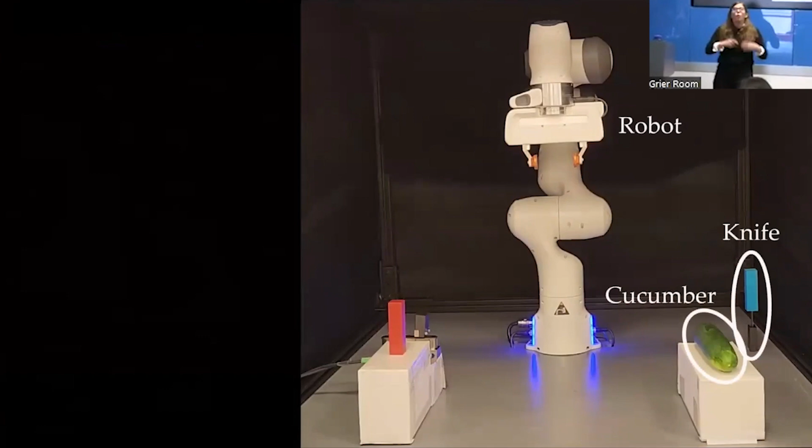So let's say we have our robot here, we have a knife, and we're going to chop cucumbers. I like cucumbers in my stir fry—sometimes it's the most controversial thing I say. So we're going to cut cucumbers, and think about what it takes for a robot to cut a cucumber.

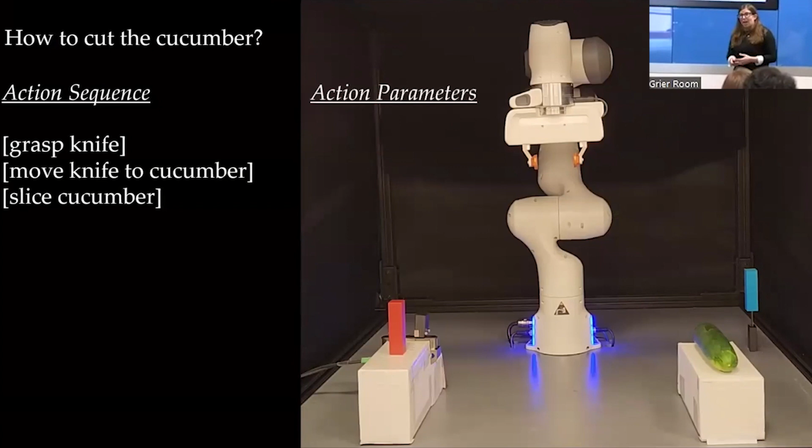I'll frame this as: the robot first has to determine a sequence of actions to complete the task. To cut a cucumber, our robot is going to grasp a knife, move the knife to the cucumber, and then slice the cucumber. Because we want the robot to execute this in the real world, it has to solve for the parameters of these actions, and these parameters are discrete and continuous and have constraints.

For example, to grasp the knife, we have to select how we're going to grasp it, but do so in a way that we can reach that grasp and exert enough force to actually slice through. If we're slicing the cucumber, we have to decide what forces to exert and how the robot will exert them. Many, if not most, of these parameters are continuous. So given this, can the robot find a satisfying set of these parameters?

Can the robot succeed in accomplishing the task with this given strategy? I'll lead the witness slightly: if the robot were to accomplish this sequence, when it goes to cut the cucumber, because nothing's holding it in place, it would roll around. Trust me, I've done it. We'd say that's bad, we don't want that to happen. The robot would fail because it's violating a constraint of holding the object still while slicing it.

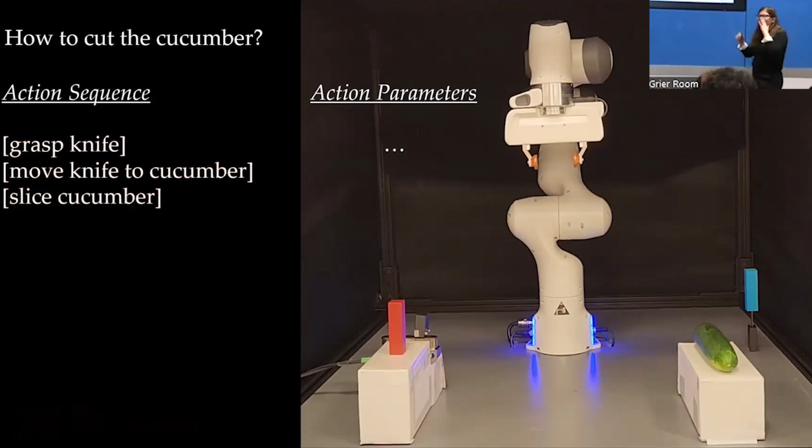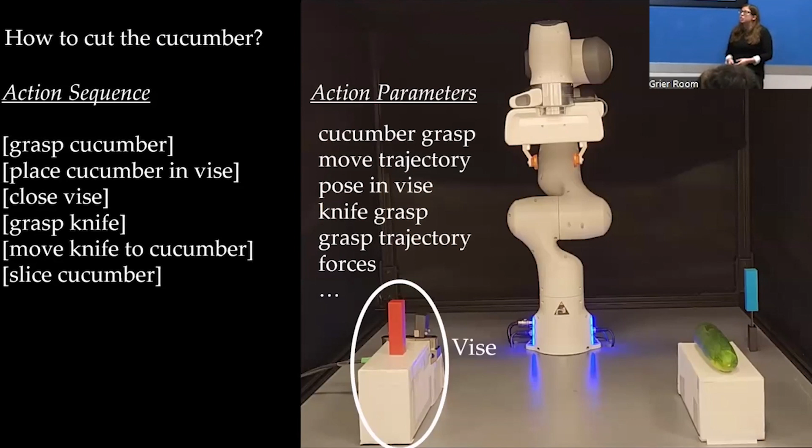So what I want my robot to do is find a new strategy, one that secures the cucumber in place before cutting it. Looking at the environment, our kitchen has a vise. We could ask our robot to find a new sequence: grasp the cucumber, place it in the vise, close the vise, grasp the knife, move the knife to the cucumber, and slice it. Again we'd have to solve for the action parameters, including how we grasp the cucumber and where we place it within the vise. So, would this succeed?

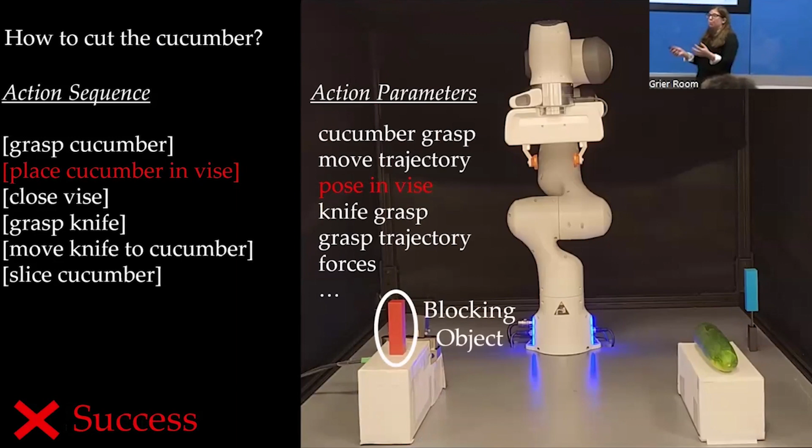Well, in this case we have this blocking object sitting on top of the vise, which means there's no collision-free pose for the cucumber in the vise, so we cannot place it there. Again, this strategy would not succeed, and our robot has to find a new sequence.

So here we can imagine the robot grasping the red block, moving it somewhere, anywhere, and then continuing the strategy from before. Will this succeed? This game is fun, I could play it all day, but third time's the charm, and in this case, yes, our robot is able to succeed. It grasps the red block and moves it anywhere, as long as it's out of the way. Once done, it goes over and grasps the cucumber.

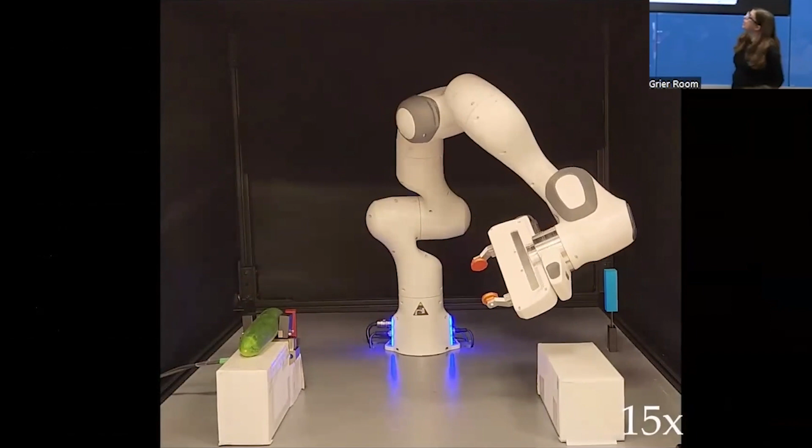The vise is part of the system, so it's the robot's responsibility to open and close it. Once it's done that, it goes to grasp the knife—oh, this gets people, it's a real knife, I do intend to actually cut cucumbers. So we grab it and actually cut the cucumber. Great, success. Good job, robot.

So in this case, the robot had to solve for the sequence of actions and the parameters of those actions, and those choices impacted each other as well as being impacted by the constraints of the task and environment. Good job, robot—I'm glad it accomplished this task in this environment, but really, I want my robot to be able to accomplish many tasks in many different environments.

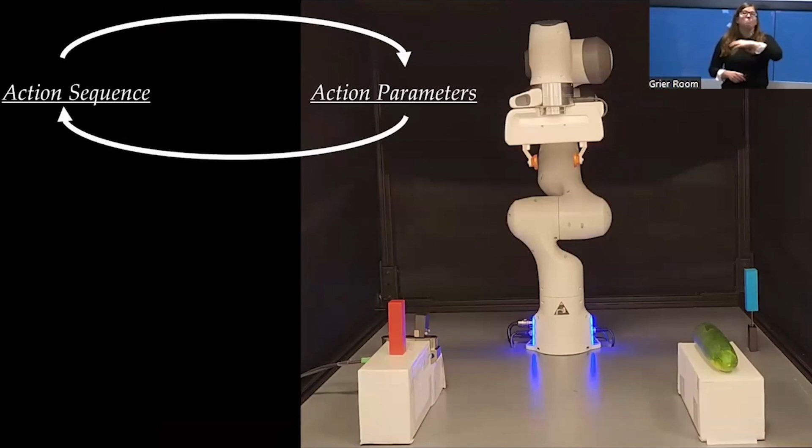And so it's important that the robot's behavior is able to generalize. In order to generalize, I'd argue the robot has to do the type of reasoning we walked through. It has to reason over how to satisfy all of these constraints across this hybrid combinatorial search space, accounting for the environment and the task.

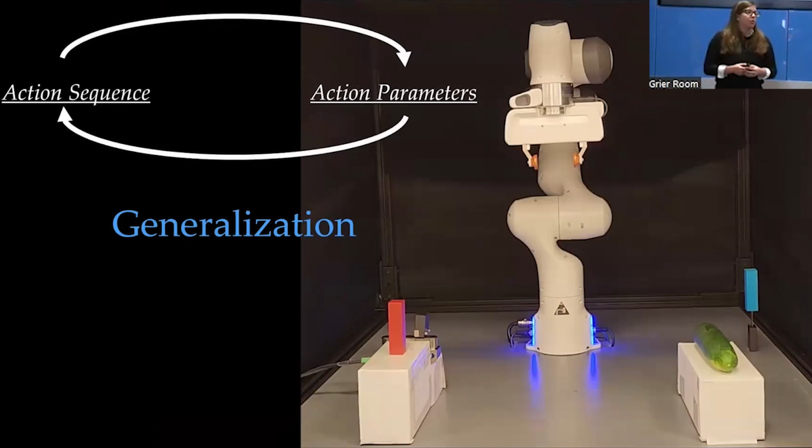Because of this, I adopt a model-based approach where we empower the robot with models of the world, which could come from engineering mechanics or could be learned, and the robot reasons over these models. If we prescribe the robot exactly what to do, it will struggle to generalize, so I want the robot to be responsible for the reasoning. Given that we're taking this model-based approach to solve a hybrid combinatorial search problem in robotics, this is often framed as task and motion planning, or TAMP.

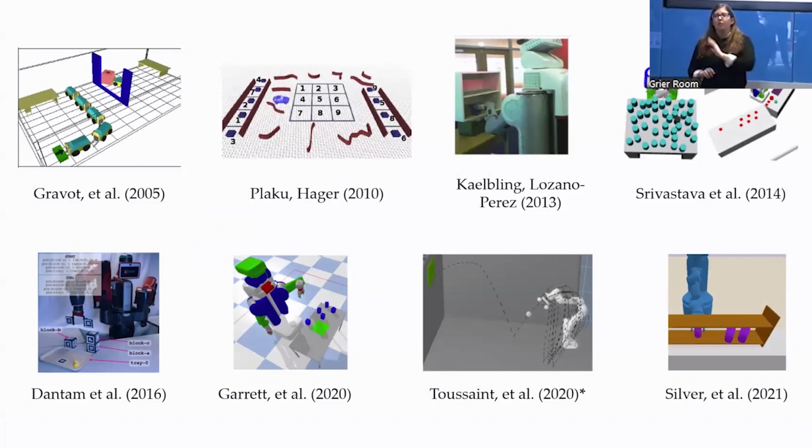My lab mates and I wrote a survey paper on this a few years back, and there's been a lot of really lovely work in task and motion planning, but the overwhelming majority of it, with one limited exception, has been focused on reasoning over constraints related to geometry. What I mean by that is reasoning over whether a motion is collision free, or a placement is free. No shade, this is still an incredibly hard problem—you have to reason over confined environments, lots of objects, or long horizons. But I'd argue this is fundamentally limiting if you're only reasoning over geometry.

This is why a lot of task and motion planning demos often look like pick and place. If we think about the kinds of tasks I started the talk with, I'd argue that in order to solve these types of tasks, our robots have to reason over both geometry and physics. We saw in our example how the need to exert force changed how we had to secure the object. You can also imagine if we're swinging a hammer, or packing dough, that all of these impact our robot's decision-making process.

The main thrust and goal of this thesis is to propose models and algorithms that enable reasoning over geometry and physics in the context of multi-step manipulation problems. For an outline of where we're going to go, I'll start by thinking about how we can plan for this multi-step manipulation, specifically focusing on where we're considering force and motion. I've already highlighted why that's particularly important.

We're going to start off in the context of a body of work we call forceful manipulation, and then we'll actually do a detour within that to talk about in-hand manipulation. Throughout all of this work, we're going to be proposing new and leveraging existing models. We'll verify that those models hold in the real world, but as we get into messier and messier manipulation, it might be difficult to have such certain models.

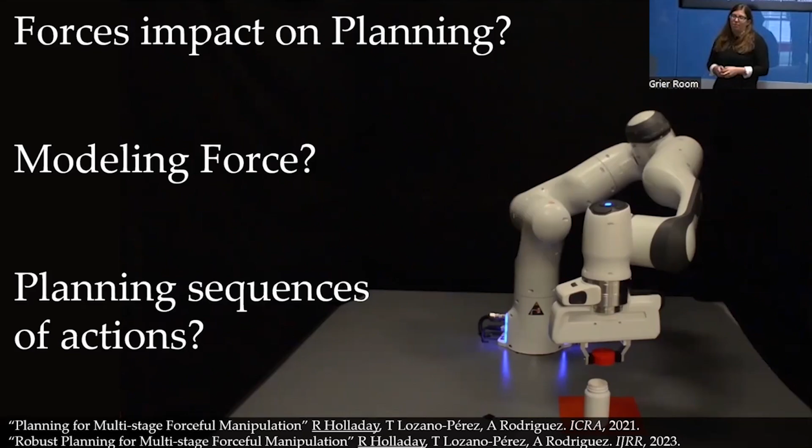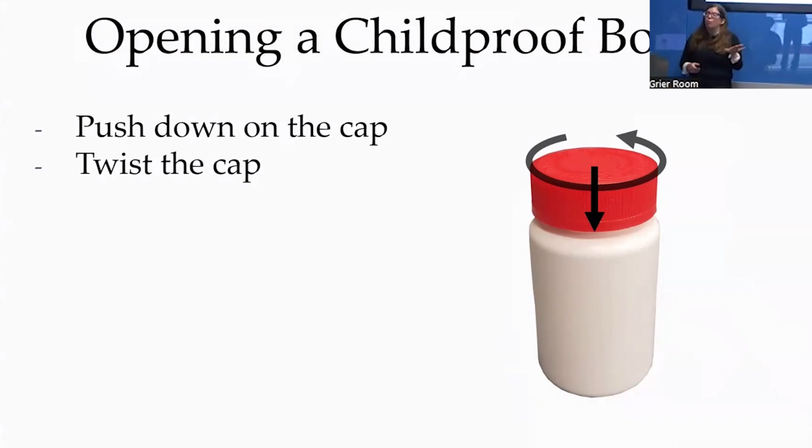The running example throughout much of this section of the talk is going to be opening a push-twist child-proof bottle. This is a bottle where, in order to open it—my favorite thing—you have to both push down the cap and twist. So we'll think of this as having to exert both a downward force and a torque about z. For now, we'll assume these quantities are given, but later in the talk we'll think about how we can relax this assumption.

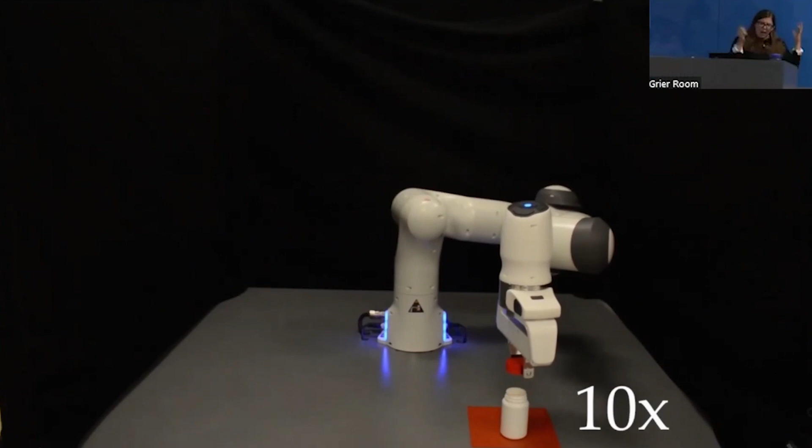So if we want to open the bottle, here is an instance of the robot doing that. It exerts that push-twist on the cap of the bottle, and then once it's done that, it can open up the bottle. And the bottle is full of rice—there's actually no pills. Okay, so the robot has done this, and we can think about how the need to exert force, how that push-twist action, impacts our robot's decision-making.

In the first way, we already saw in the cutting example, which is that if we're going to exert force on an object, we have to hold it still. To prove that here, we do not hold the bottle still—it slips relative to the table, and so we are not able to successfully exert our push-twist, and when we go to open the bottle, we do not succeed.

If you're going to exert force on an object, you have to hold it in place. The environment, either through objects or the robot, has to hold it in place. I'll note that the reason it didn't slip before is because in this video, the object is sitting on a high friction surface that's effectively holding the bottle in place. I'll refer to this as our fixturing constraint, that you have to hold the object still. That's the first way that forces impact planning.

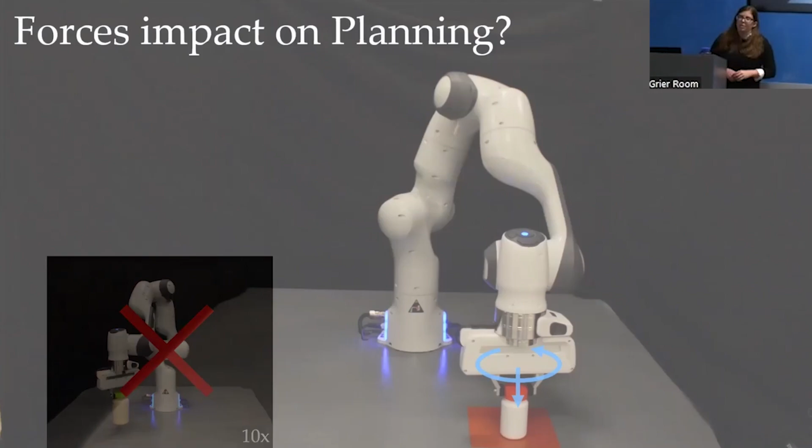And the second way is that if we're going to exert a force, our robot has to be strong enough. To explain what I mean by that, we're going to do a dive into mechanics.

I'm going to view the entire system while we're opening the bottle, including the robot, the bottle, and the table, as one kinematic chain. That kinematic chain is formed of a series of joints. Some of those are robot joints, and some of those are frictional joints formed via contact, for example, the robot's grasp on the bottle.

The constraint that needs to be satisfied in order to successfully complete this task is that in the face of the exerted wrench, the force and torque experienced during our push twist, each of the joints within our forceful kinematic chain needs to be maintained. Each of our joints needs to be able to resist the wrench.

To capture this, we're going to mathematically model the amount of force and torque that each of our joints can resist. If all of our joints can resist it, we'll say that each of our joints satisfy the constraint and our overall chain is stable. Yes, I'm misusing the word stable.

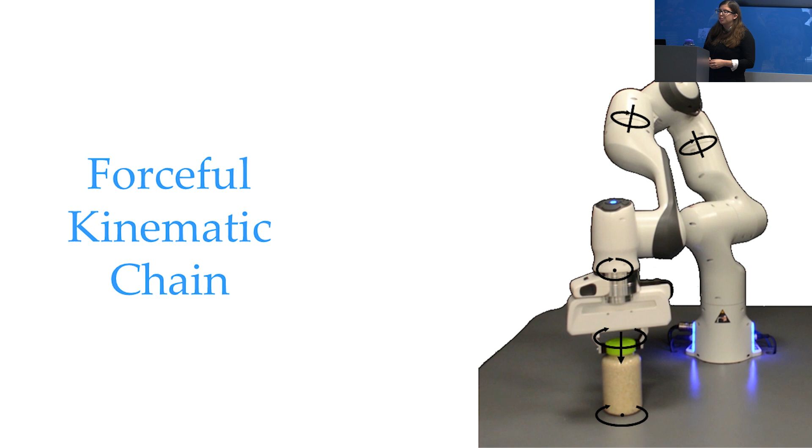Okay, so to map this through, let's think about our different types of joints and how we can capture how much force and torque they can resist. I'm going to start off with, I'd argue, the easier case, thinking about a robot joint. Robot joints have torque limits, they're limited in the amount of torque you can exert. Breaking that joint, or violating that constraint, would correspond to the robot hitting a torque limit.

It makes a very sad noise. We want to avoid that. So how do we capture if we're within our robot's torque limits?

What we need to do is take the force and torque experienced during the task and transform it into torques experienced at the joint. The way we do that transformation is we take forces and torques, called wrenches, experienced in the task, and transform them into the frame of our hand, our end effector. This is a rigid body transformation. Now we need to transform it into torques at the joint.

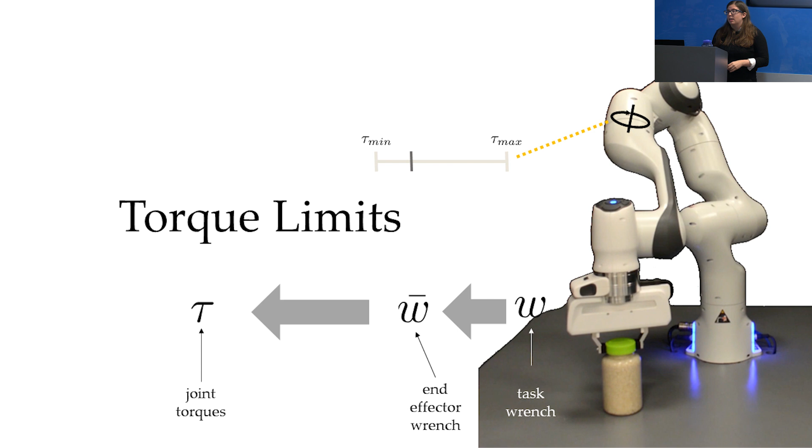The way we do that is an operation called the manipulator Jacobian. If you take the forward kinematics of a robot and differentiate it with respect to time, you get the Jacobian. The Jacobian maps joint velocities to end effector velocities, and beautifully, the transpose of the Jacobian, which is what we have here, maps end effector wrenches to joint torques, which is exactly what we're looking for.

I'll note that it's parameterized by our joint angles, our configuration Q. Intuitively, this makes sense because if you think about your own arm, there may be certain configurations where you can resist more or less force, and our configuration-dependent Jacobian is capturing that.

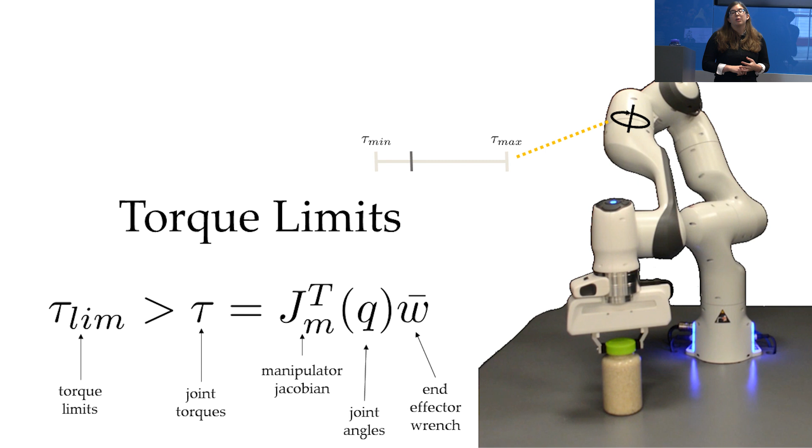We use our Jacobian, transform into joint torques, and then we can compare to check if we're within our robot's torque limits, which we'll assume are known. We can do this for all of our robot joints, evaluating if our joints satisfy our constraint. Great, these are our robot joints.

We have another type of joint that we're considering, which is our frictional joints formed via contact. In this case, we have two examples: the robot's grasp on the bottle, and the bottle's contact with the table. We'll say that for these types of joints, breaking happens if the two objects move relative to each other. So we want to think, are these joints stable? The question is, what type of motion is achievable for this type of grasp, this type of joint?

Well, I'll observe that both of these are planar joints, and to explain what I mean by that, we'll look at one in particular.

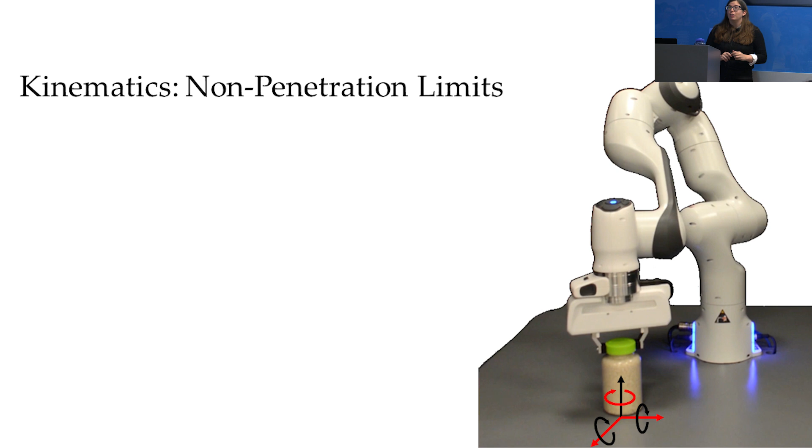If we zoom in on the contact between the bottle and the table, I'll argue that in 3 dimensions, the bottle cannot move. This is because we assume we have rigid bodies, so we cannot rotate or go into the table. In those 3 dimensions, we can resist any exerted force and torque kinematically due to non-penetration limits. Now in the other 3 dimensions, we can move, and we saw it slip, so we know it can. What prevents motion in these directions is friction.

So the question is, how much friction do we have? For a planar joint like this, we can capture the space of exerted wrenches provided by frictional support by something called the limit surface. Because we're dealing with a planar case, we can construct the limit surface either using something called the ellipsoidal approximation or the generalized friction cone.

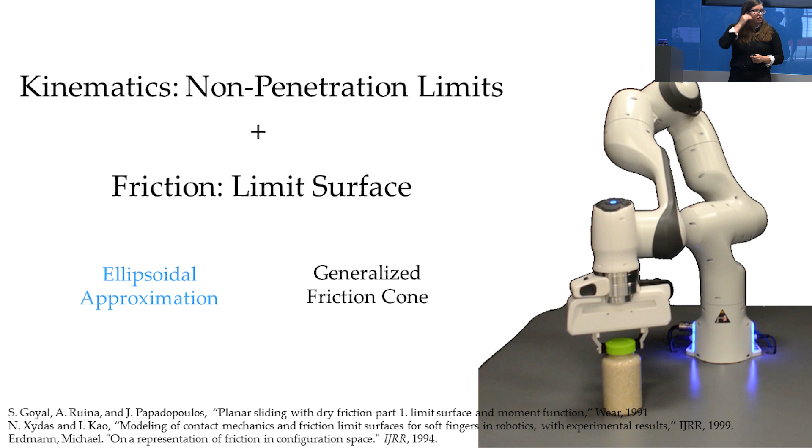To better understand what the limit surface is, we're going to dive a bit more into the ellipsoidal approximation. So if you have a planar joint, and we assume you have uniform pressure distribution and isotropic friction, then you can capture the space of wrenches that a frictional support provides by an approximation called the ellipsoidal approximation. You can capture the space of wrenches as an ellipse.

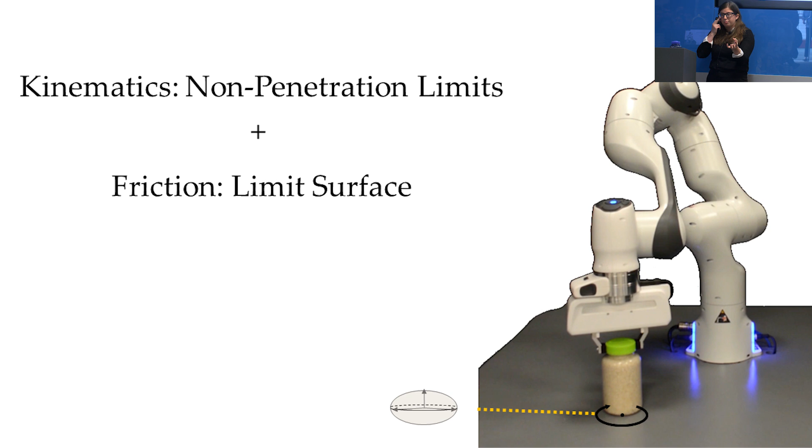Looking at a planar grasp in a bit more detail, one way to think about this is that if we have an exerted wrench and transform it into the frame of the hand, if the exerted wrench lies within the boundary of the ellipse, we say we have enough frictional support to resist that exerted wrench, and our objects are not going to move relative to each other. Effectively, friction wins.

But we can imagine there are different grasps where, when we transform the exerted wrench into the frame of the hand, if that exerted wrench lies outside the boundary of our ellipse, then our exerted wrench overpowers our frictional support and the two objects move relative to each other. Now, how it moves is actually well characterized, but we're not going to use that just yet. We're just going to check: do the two objects move relative to each other?

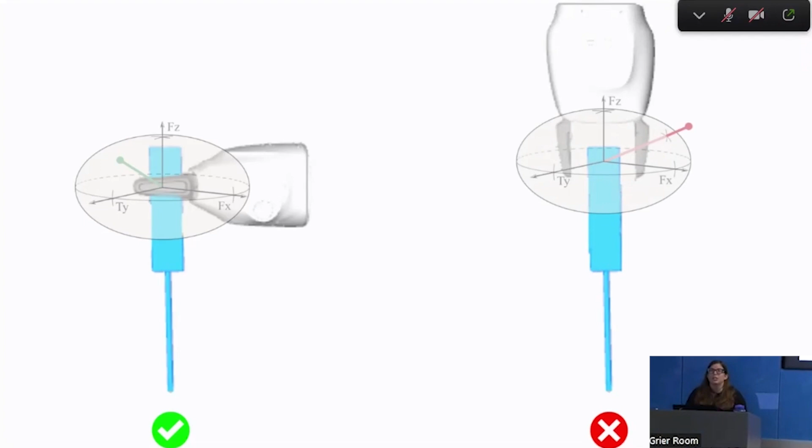Summarizing, the limit surface is in 3 dimensions. As I mentioned, we're dealing with a planar case. For isotropic friction, it's characterized by this matrix A. A is parameterized by our grasping force N, our friction coefficient mu, our radius of contact R, and an integration constant C. This means we assume that all of these quantities are known. Later in the talk, we'll think about how we can relax this assumption.

So to use the limit surface, we do a rigid body transformation to transform our wrench into the frame of the hand, and then evaluate whether this vector lies within an ellipse. This is an incredibly efficient computation. So if we want to evaluate whether our frictional joint due to contact is stable, we're using a combination of kinematics and friction to assess these types of joints.

Summarizing it all together, we now have a way of characterizing, for each of our joints, whether it can resist the exerted wrench. In this case, maybe not a surprise, our constraint is not satisfied. We actually saw this before—this is the case where our bottle slipped, and our models guessed that ahead of time. I made the robot do it even though I knew it would fail. So in this case, I want my robot to find a new strategy that constructs a new kinematic chain with a new series of joints that is stable and where our constraint is satisfied.

Summarizing this section, we captured how to account for the constraints that exerted force imposes on a robot's decision making. We took the intuitive notion of whether the robot is strong enough and quantified it mathematically. While I walked through a couple different types of joints and models, it would be fairly easy to swap in other models. There's a 6D version of the limit surface if you're so inclined, and you could always consider those.

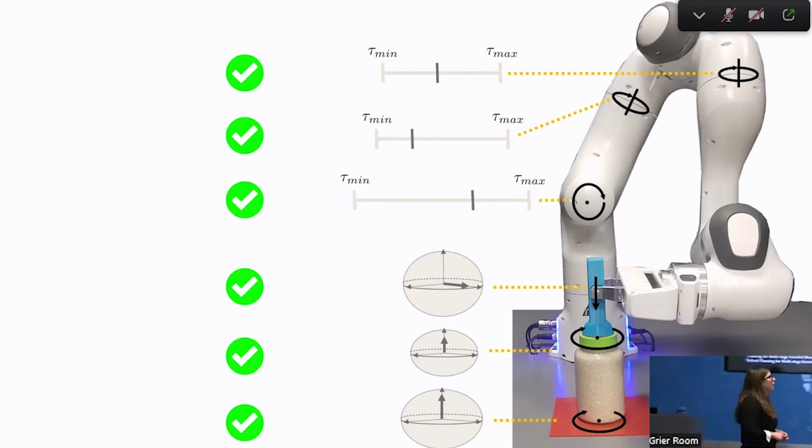Okay, given that we have these models and these constraints, the question is now, how do we plan with them? In order to answer that, I'm going to make concrete some things I was vague about at the beginning, because I've been talking about wanting a sequence of actions, but I didn't define an action, and none of you called me out on it, which is very polite. But now I would actually like to define that.

So I'm going to consider an action as a parameterized controller. We have some controller that we are executing on the robot and has parameters. For example, here is our place action, and you can imagine it's parameterized by things like the grasp and the placement pose. And if you're curious, it is running a joint space and grasp controller.

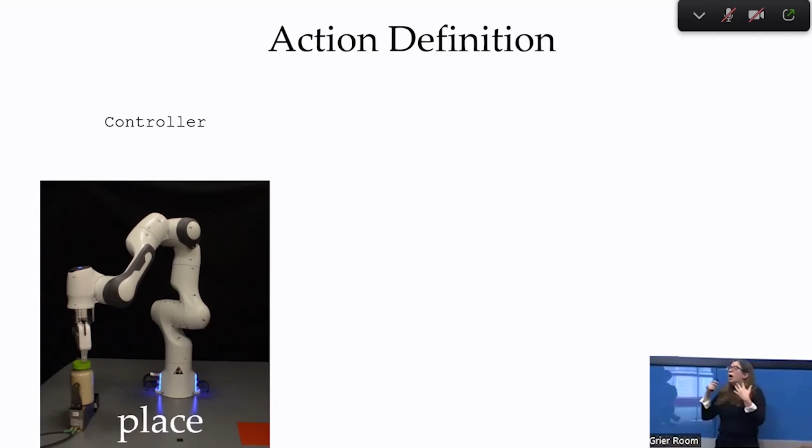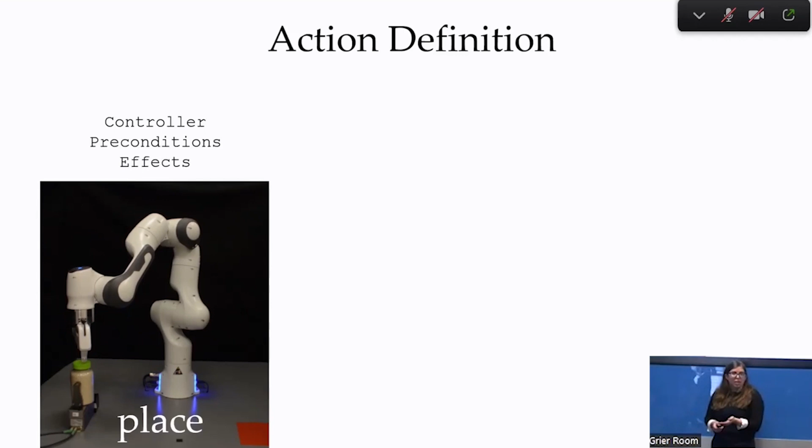Now, we're going to characterize our actions by two things called preconditions and effects. Preconditions are what needs to be true about the world in order to execute that controller. So you can imagine for the place action, a precondition is that our placement pose has to be collision-free. And then we'll also characterize it by its effects. The effects are what are the resulting changes to the state as a result of running that controller. You can imagine an effect of placing is that you are no longer grasping the object. And these are both characterized in PDDL.

So this is one action. We can characterize kind of a whole set of actions. Here's an example of the move action. Here's an example of the push twist action. I want to call special attention to the push twist action, because it is an action that exerts force.

And so what we say is that a precondition for executing this action is that the forceful kinematic chain throughout this action has to be maintained. And so that is how the constraint gets baked into the system, is that it is a precondition for any action that exerts force. I'll also note, if you're curious, that the controller we use to exert force is a Cartesian impedance controller. I'm happy to talk about that at length if anyone wants to.

Okay, so given that we have kind of our sequence of actions with this parameterization, our task and motion planning objective is that we want to find a sequence of actions. We want to find the parameters of those actions subject to constraints. And those constraints are captured in our preconditions and effects, and they relate to both force and motion.

And so there are many task and motion planning solvers, but I'm going to talk about my favorite, the best one, which is PDDLStream. So PDDLStream is a task and motion planning framework. I think it also, in addition to this is what we use, I think it gives a good illustration of kind of what are the challenges of task and motion planning.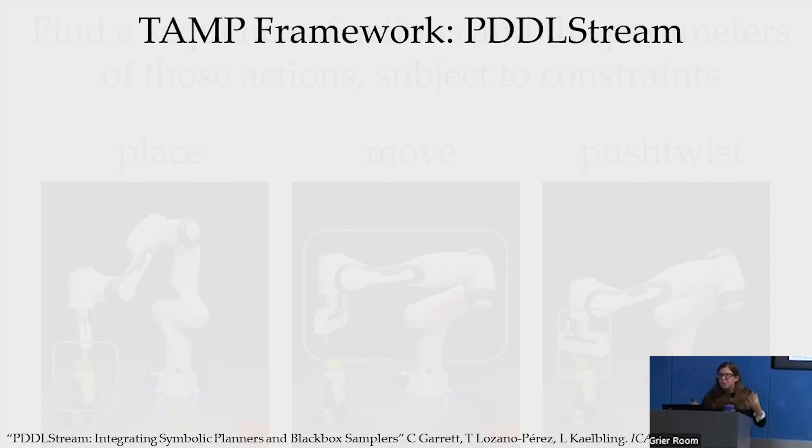But to use PDDLStream, you have to specify a series of what's called streams. And streams can do one of two things. One is that they can generate possible instantiations of your action parameters. Now, your action parameters are often continuous, so you can think of these as samplers, and you could have streams that, for example, sample grasps or sample forces.

You can also have streams that themselves run entire planners, so you could have streams that run a motion planner to sample a trajectory or generate your impedance parameters. Our streams, in addition to generating possible instantiations of our action parameters, they can also evaluate constraints over our parameters. So for example, we've got streams that evaluate our forceful kinematic chain constraint, or evaluate if a path is collision-free.

Now I'll note that the algorithms, the implementation, the models of this, they could be analytical, they could be learned, they could be some combination, you can kind of put anything in here. I'll also note that in defining a new domain, such as considering manipulation that reasons over force, the majority of the work is in specifying the samplers, because that is where all of the gory, messy details come in.

For me, this also highlights that task and motion planning as a computational framework is a way for bringing all the pieces together, but you do not get away from having to solve all of the beautiful physics and geometry problems. Okay, given that we have these streams, we're going to start the algorithm by generating some instantiations of our streams.

So it's going to sample paths and grasps and wrenches. And it's going to take that along with a specification of our actions, our start state, and our goal state, and hand it off to a PDDL planner. This is a domain-independent discrete planner that is going to search for possible sequences.

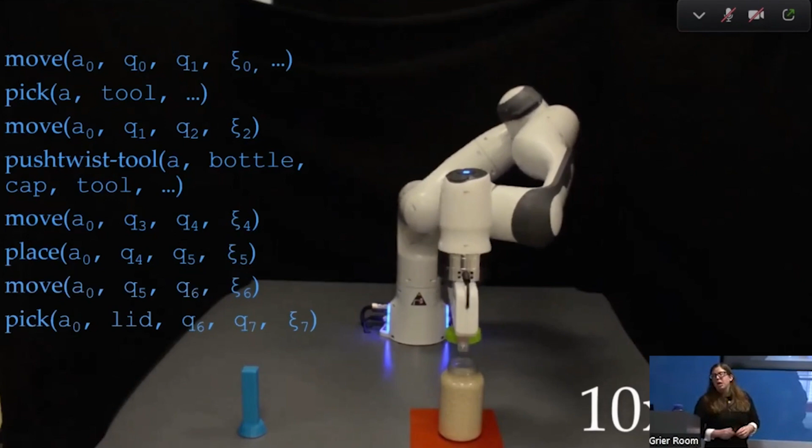And it's because we've empowered our robot with models in an action space that the robot can then use that to do decision making across a variety of different tasks in the same framework. Not only can it solve this task in a particular environment, but it can solve this task in a variety of environments. So here, I've asked it in every case to open the bottle, but the objects are in different places, there are different objects in the scene, and so the robot is reasoning over all of different, infinite number of strategies that it can use.

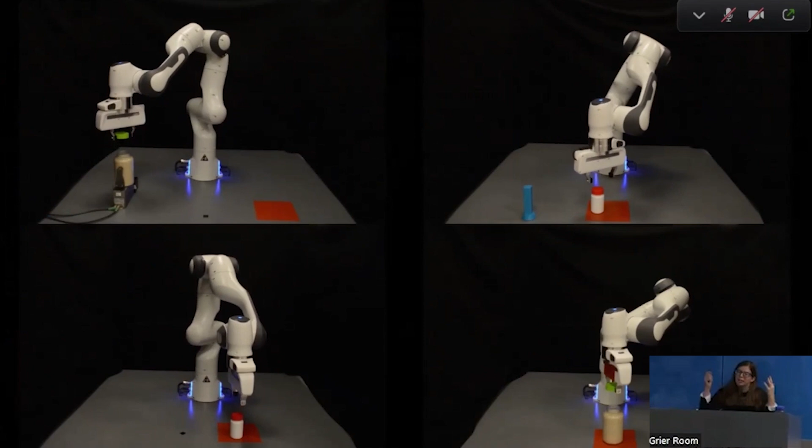Sometimes it leverages the device, sometimes it relocates things, sometimes it uses the tool, and it's able to find this rich set of things, which for me is necessary for the robot to generalize, because I want it to be able to do this in many different environments.

I'll quickly note that in addition to cutting cucumbers and opening bottles, we also demonstrated this in the context of twisting a nut on a bolt, a more classical tool use task. We didn't have a bimanual setup, so I apologize for this being in simulation, but I did want to demonstrate that you can do this type of coordinated bimanual manipulation just as easily.

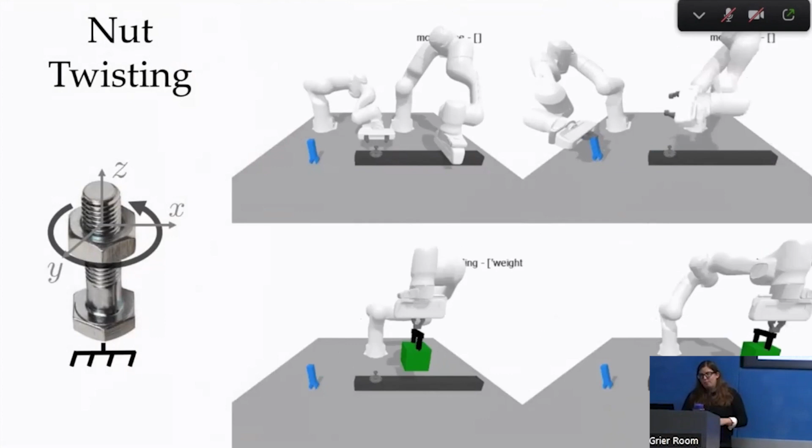So summarizing from all of this, we captured what is the constraint required in order to reason over exerting force, and then integrated that in the context of a task and motion planning framework in order to solve these complex manipulation tasks. And before we move on, I want to take that quick detour that I promised, which is that, if we think back to the task and motion planning framework, as I alluded to, the heart of this is really the streams, the planners. And so while I just walked through how you can reason over exerting force on the task and motion planning level, you could also imagine having individual streams that reason over force.

And to demonstrate that through example, I want to take this quick detour into regrasping and thinking about in-hand manipulation as an instance for where you can reason over force in a different context.

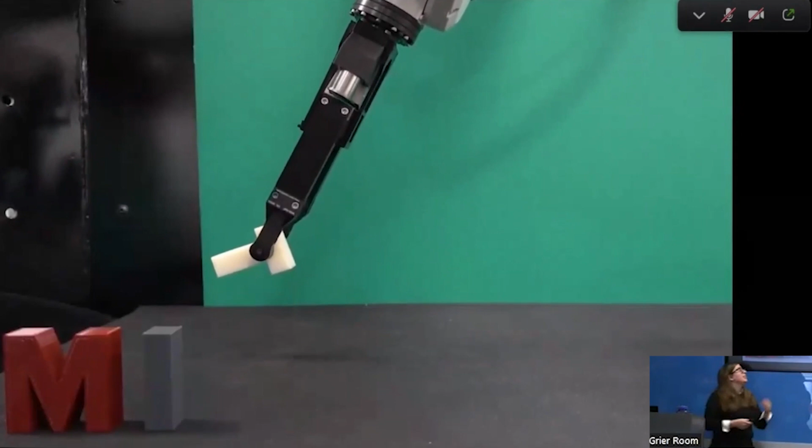So let's say that I want to spell out a funny word. And because of the environment, the space of initially available grasps does not overlap with the set of grasps that allow me to achieve the task. Now, yes, this is a little bit contrived, but I would argue the need to change your grasp happens a lot throughout the... I'm sorry, it was beautifully designed. Sorry, Alberto.

This happens a lot - if you open the totally not messy toolboxes in MCube, you may have to pull a screwdriver out from the tip and then change your grasp in order to tightly grasp the handle. And so there's been a lot of work in manipulation on thinking about how you can change your grasp and regrasp, including work by my own sister. So there's been a lot of beautiful work.

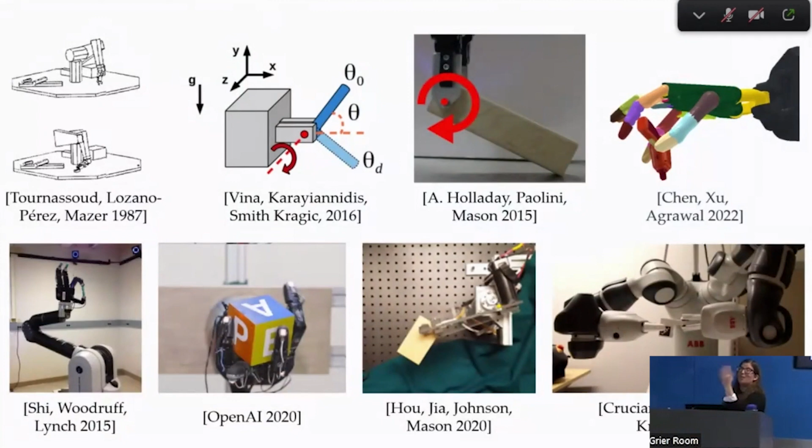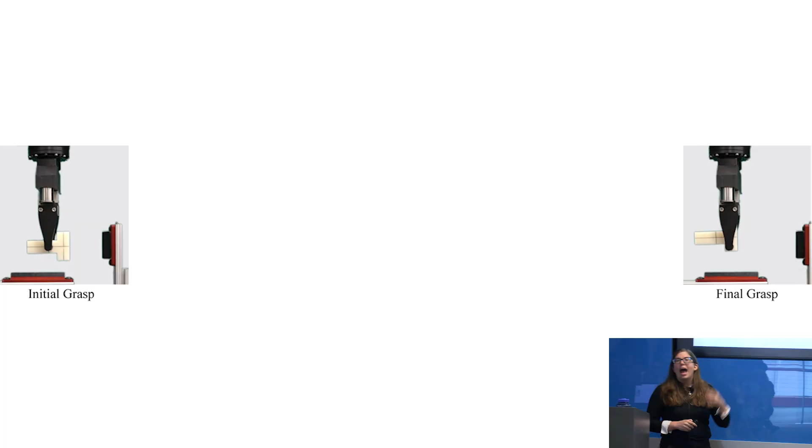So our planning problem here, to make it concrete, is that we have some initial grasp, we have some final grasp, and we know where in the world we can push against. And our planning problem is that we want to find where and how to push against in order to move our object in hand from our start grasp to our final grasp.

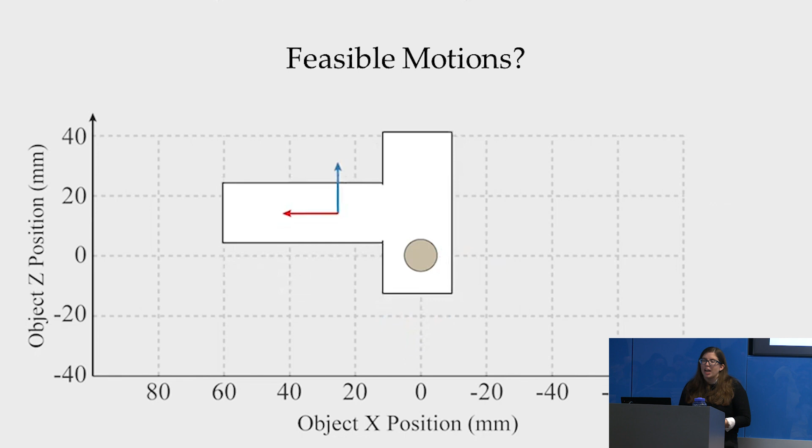Now, the fundamental constraint or difficult part of this problem is capturing, for a given pusher, what is the sequence of motions that are reachable. And it's because due to the underactuation of friction, for a given pusher, there are some motions that are possible and there are some motions that are not. And so we have to map out what is the space of reachable motions for a given pusher.

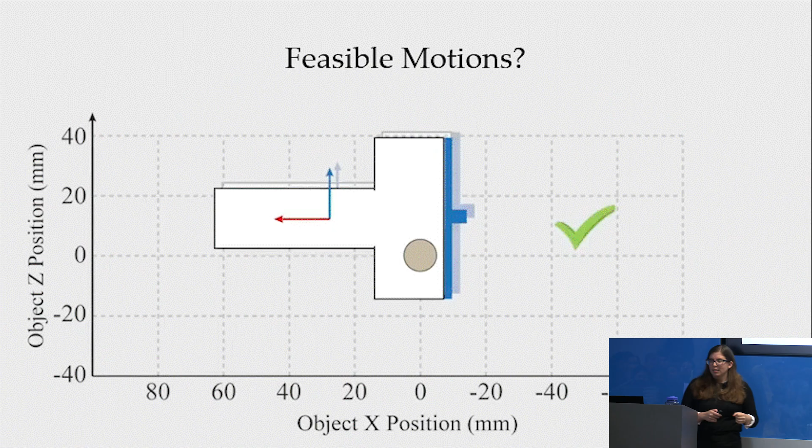In 1986, my academic grandfather, Matthew Mason, defined the motion cone as the set of feasible motions that a rigid body can follow under the action of a frictional push. Great! This is exactly what I said we wanted. Are we done and can we go home because Matt already solved it? Well, not quite. Matt left us some work.

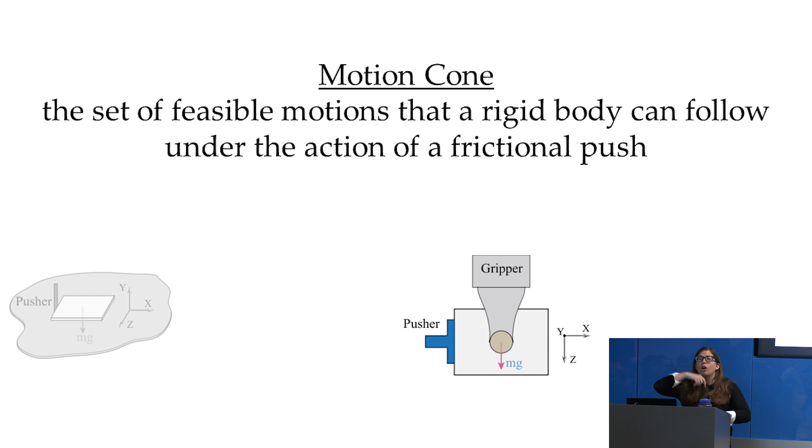The motion cone as originally captured really only captures the planar case where you're operating on a table. It does not capture the case we show in the video where we're acting in the vertical plane, with the effect not only of the pusher, but also gravity, and our support surface is not a table, but our grasp. So one of the main contributions of this work is extending the notion of the motion cone from this setting to all of these settings, generalizing this fundamental concept within manipulation to consider a broader set of external forces and support surfaces.

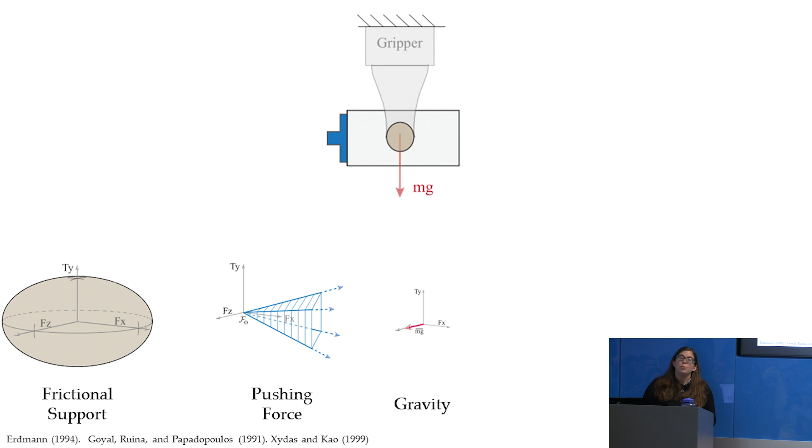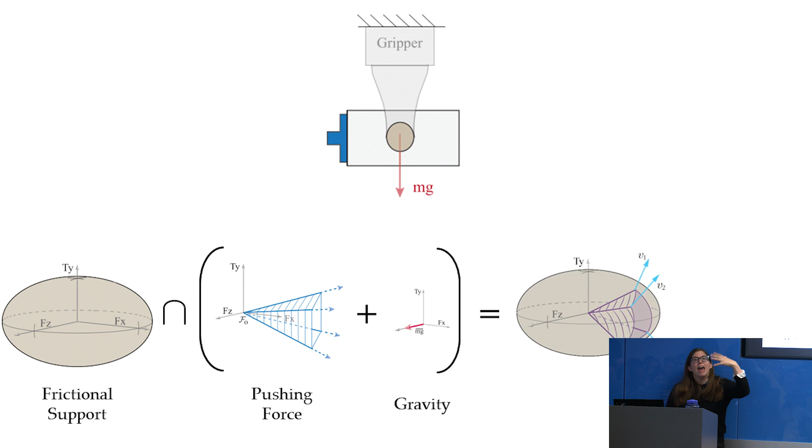We want to construct the motion cone, the set of feasible motions we can achieve under a frictional push. This uses a lot of the tools we've talked through before, like our ellipsoidal approximation of the limit surface and our generalized friction cone. We combine all of these forces and then solve for the resultant motion, which is our motion cone, the set of feasible motions. A motion within this cone corresponds to a motion we can achieve under our frictional push.

For any model, we experimentally verified it with thousands and thousands of pushes, and the motion cone does hold fairly well. Given that we have this approximation and we trust it, we can return to our planning problem. If we're starting at an initial grasp for a set of available pushers, the motion cone defines what our reachable set is, what our set of feasible motions is.

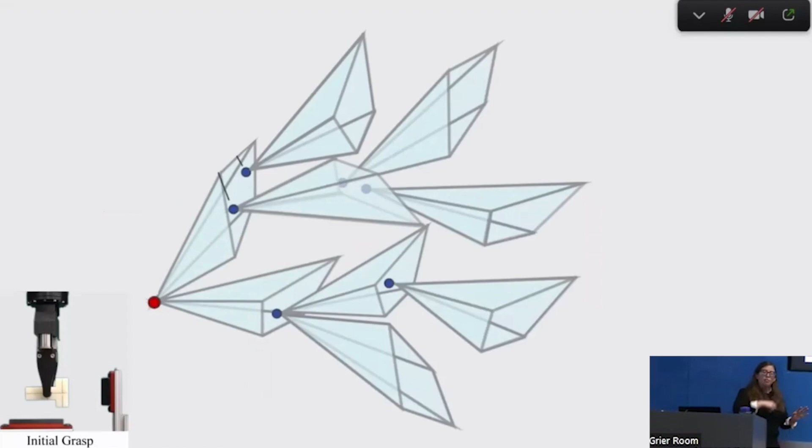We frame this as a sample-based motion planning problem. We specifically use RRT-star, to map that reachable set forward in order to plan for a sequence of pushes that moves us from the initial grasp to our goal grasp. And we can see this in action.

Here, the robot directly pushes to the side. But if we swap out our fingers for slippier fingers, the robot knows it has to push down first before pushing to the side, to account for the force of gravity that's going to cause slipping as it does that side push. We're giving the planning times on the side, and it's able to plan these in fractions of a second, in contrast to a previous method that had to solve a gross inverse dynamics problem and took significantly longer. We do assume we know the object geometry, but we're able to handle things that are non-convex.

Summarizing, we extended the notion of the motion cone to consider a broader set of planar tasks. We captured all of the messiness of friction and gravity within a closed-form set. And given that reachable set, we were able to apply it in the context of a sample-based motion planning problem in order to enable regrasping.

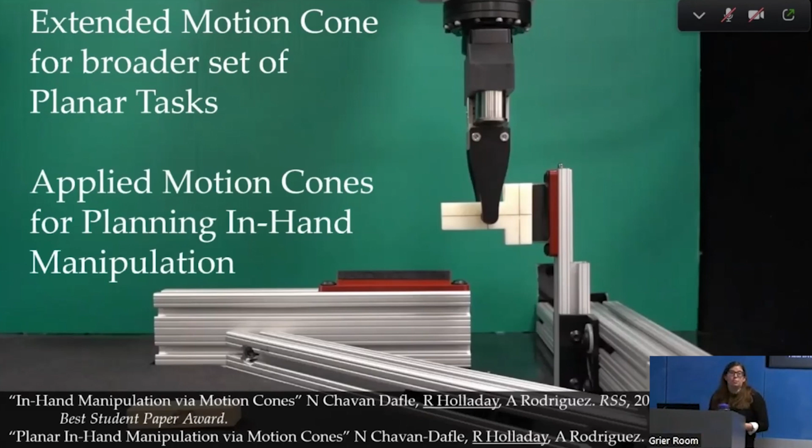Going back to where we started, we can think of this entire work as basically serving as a planner that can fit as a sampler within the context of our task and motion planning framework. All of this work gets us a new skill unlocked for a robot that we can now sequence with all of our other skills.

Summarizing again, a little bit bigger picture, across this we've seen how to reason over forces both at the task and motion planning level and at the planning level. Before we move forward, are there any quick clarifying questions?

Everyone always wants to move on to uncertainty. Okay, let's talk about uncertainty.

So in this case, we were thinking about models, and what I now want to think about is if we move into messier manipulation, how can we get our robots not only to reason over constraints related to geometry and physics, but to do so when we have uncertainty about both. We'll start by thinking about, in the context of forceful manipulation, how we can make robust decisions given uncertainty about our action parameters and state parameters.

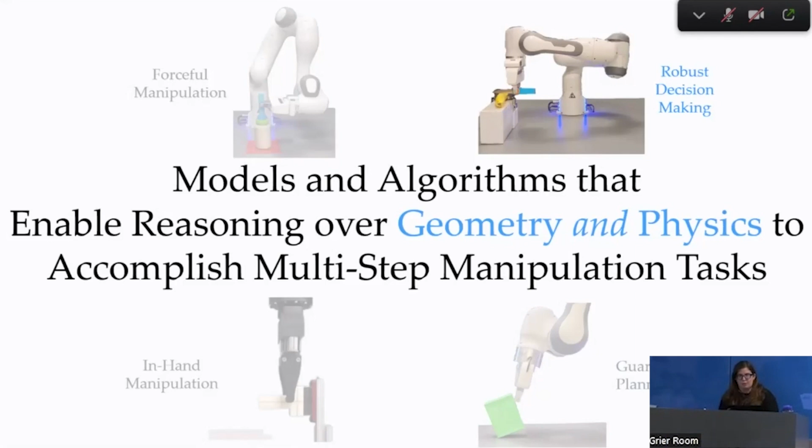To explore this, we're going to return to our cutting domain. Although there are infinite ways to grasp the knife, for now we'll consider 3 different grasps as illustrative examples, and only consider the downward slicing motion of the cutting action. Given our forceful kinematic chain models, and knowing what the object is, for each grasp we can evaluate whether the forceful kinematic chain constraint is satisfied, and check if all of our grasps are stable.

If we're cutting an object with low force requirements, like a peeled banana, then for all of these grasps we can say it is stable, and we're able to cut through the banana in all cases.

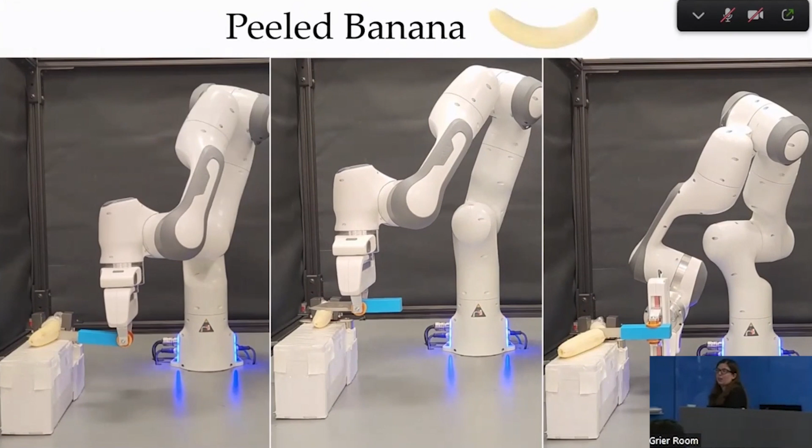But let's consider something with higher force requirements, like an unpeeled banana I did not peel for the robot. In this case, the grasp was just barely stable because there's a lot of variation in bananas, so maybe this grasp is not stable. It was all planned, Tomas. This middle grasp is stable most of the time, and this far grasp is easy peasy banana squeezy - it can cut it all the time.

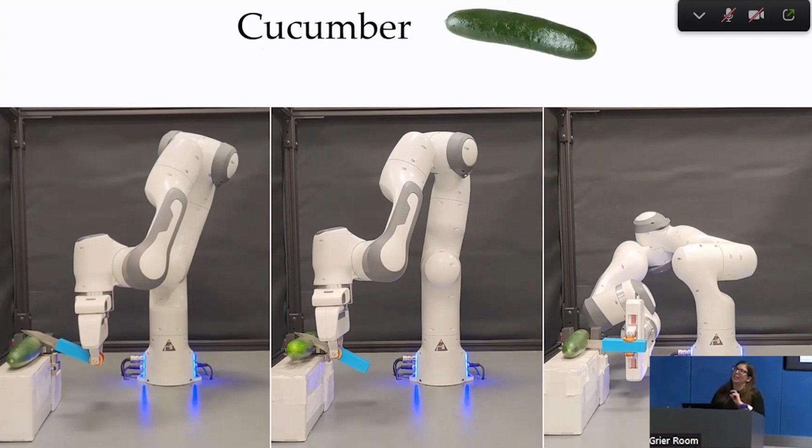Now we're going to move past bananas and think about something that requires even more force, like our old friend the cucumber. In this case, these 2 grasps that are grasping from the top are not able to cut through the cucumber. But the grasping from the side is. If you were really paying attention in the very first video, you would have seen this coming.

Now, while I'm showing here one video for each food and grasp item, for each of our 9 conditions, we repeated this 10 to 15 times.

So not to brag, I've had a lot of meals prepared by a robot. They're just not ones my parents would approve of for dietary reasons. So this is why I have to keep going.

But if you looked at all of those videos of us cutting, and didn't watch the part of me eating, you might conclude that this grasp on the side is the best, because it was able to cut through the largest majority of items. We've talked about enabling a robot to do a lot of this reasoning, but if this is always the best, then why do the reasoning? Why can't we just always go with this one?

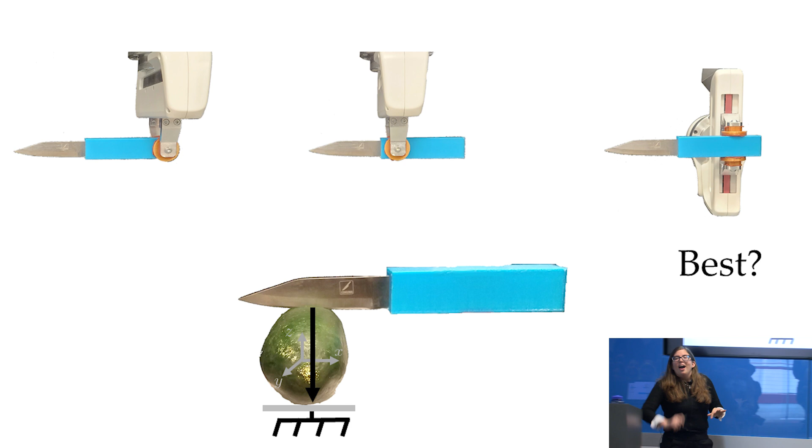But that is not always the case, for 2 reasons. There's not actually one grasp to rule them all. That's because this is the strongest grasp for this particular task, for this particular wrench - that wouldn't hold true for every possible wrench. But more broadly, it's not just about being strong enough; we have to consider both geometry and physics.

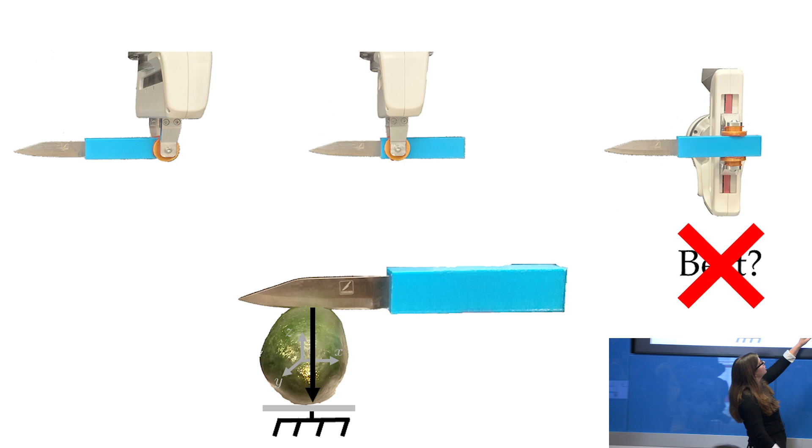If you look at this grasp, because of the geometry of the Panda hand, which is quite fat, this grasp is actually only possible and only collision-free if the thing you're cutting is elevated. That's why all of our cutting boards were very thick. So you might imagine scenarios where you'd prefer this middle grasp, because it might be strong enough and can reach a more confined set of spaces - it might be a better trade-off.

Now, there might be times when you're cutting a cucumber and you truly need the strongest grasp, in which case your robot would need to plan a sequence of actions to relocate the object somewhere you could reach and use this grasp while it remains collision-free.

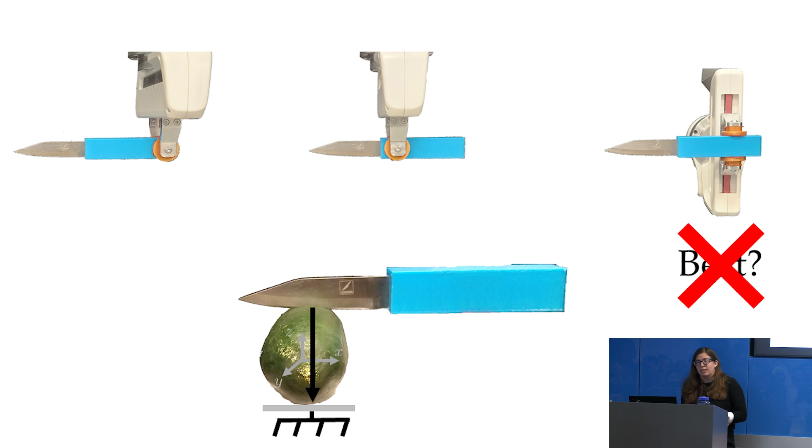So the question is, if I want my robot to be able to make this kind of reasoning, to do these kinds of trade-offs, that's not only capturing our geometry and physics, but reasoning over uncertainty and making choices about what is the most robust choice, how do I enable that? So we're going to think about that by enabling robustness, by thinking about robustness as a cost.

What I mean by that is that we're going to take our forceful kinematic chain models, and we're going to take the parameters of our models, like the area of contact, the force required, the coefficient of friction, like all the things I said we assumed were known, and we're going to perturb those. You can think of that as capturing a bounded amount of uncertainty in those parameters. And across our perturbations, we're going to count how many lead to a successful forceful kinematic chain. This gives a probability of stability over perturbations in our physical parameters.

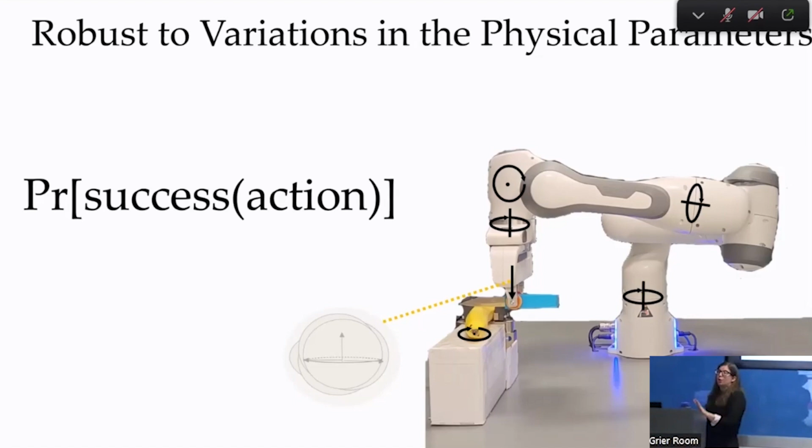And if we take the cost of an action to be the negative log of this probability of stability, then what we can say is that by minimizing this cost, we're going to maximize plan success likelihood. And within a framework like PDDLStream, we can implement additive action costs, so we can say that the cost of a plan is the sum of the cost of our actions. Then we can ask our planner to find a cost that is within some permissible threshold.

In the illustrative examples for cutting, I was only thinking about the downward motion, which you're correct is only half of cutting, because we frame cutting as downward and then slice. When computing all of these, it is considering all possible motions, so it is not constrained to just that.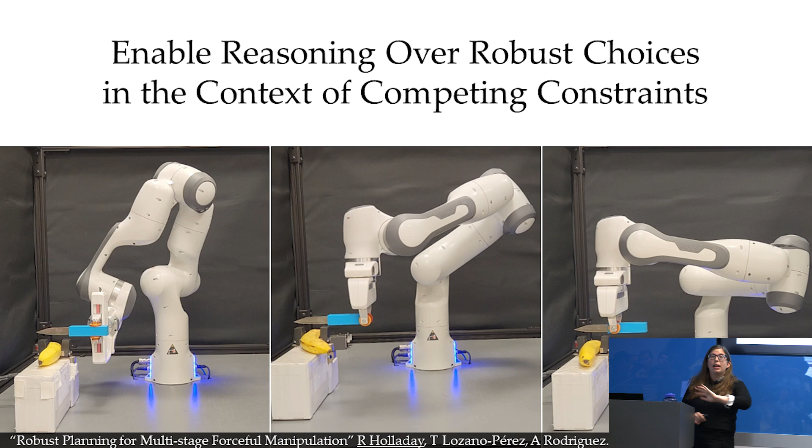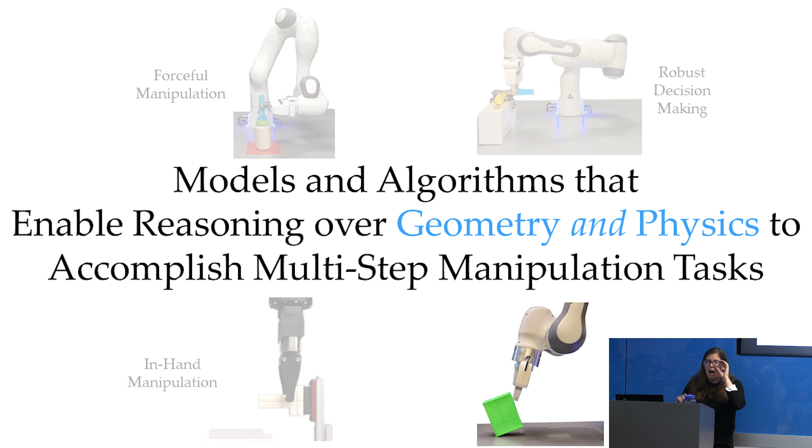OK, so thinking about robustness and this kind of conformant planning is one way to handle uncertainty, but it's certainly not the only way. For what is the last technical component, I want to think about a different framing of uncertainty. Particularly, we're going to think about action uncertainty in the context of dynamic manipulation.

So throughout this talk, we've dealt with a lot of different actions. We've been building up an action space. A lot of these actions we can model either kinematically, like move, or quasi-statically, like the regrasp manipulation enabled by our motion cones.

But I want to push my robots further, and I want them to be able to consider dynamic actions. For example, I want my robots to be able to topple and push things, because enabling robots to do this in a dynamic, non-prehensile way expands their reach—they can manipulate things they can't directly grasp, and in some cases perform manipulations more efficiently.

So in the same way that I have a move action, which takes me from a start configuration to a goal configuration through a series of motions, I want to add to my robot's repertoire a dynamic non-prehensile move, a DNP move, that allows my robot to manipulate an object from a start pose to a goal pose through a series of these bounded non-prehensile dynamic actions. So we're going to think about how we can enable this.

So I've touted these actions as being really helpful, but we also must face that they are highly uncertain. This is the same action repeated twice, and we get fairly different results. So the question is, how do we model this type of action?

Throughout this talk, I've really leveraged a lot of models from classical mechanics, but for these types of dynamic manipulations, like this kind of fast pushing style, there don't quite exist efficient closed-form good models of the dynamics. That's okay—classical mechanics is not our only source for models. In this case, we're going to opt to learn a model. What I mean by that is for an action, an object, and a surface, we're going to gather a sparse amount of demonstrations or examples of our action executing, and we're going to take the resulting outcomes.

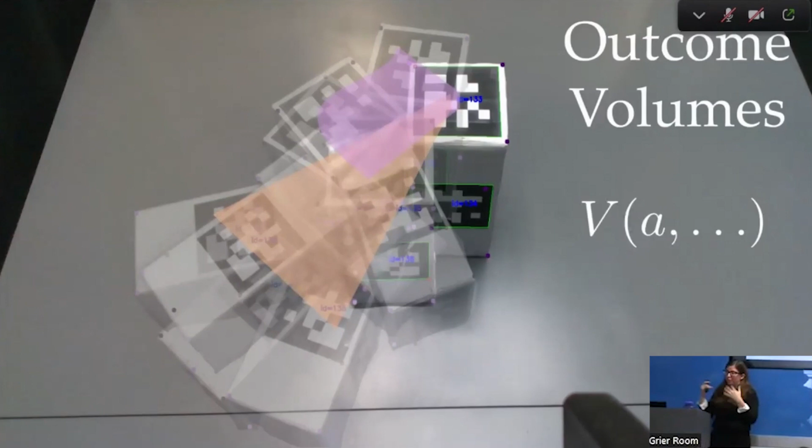We're going to factor by face, and we're going to learn what I'll call outcome volumes. Outcome volumes capture the space of possible resulting configurations having taken that action. This is not a probability distribution, because that would require way more data to characterize, and I am not willing to gather that much data. So we're only going to capture the space of possible configurations. I'll note that the outcome volumes, while conditioned on several things, we're going to assume are positionally independent, and while we gather them in a space without obstacles, we are able to handle environments with obstacles with some limiting assumptions, which I'm happy to get into in more detail.

Given that we have this very uncertain model of our object's transition function, we're going to frame that DNP move planner as a contingent planner. What I mean is that we're going to ask the planner to generate a sequence of possible actions. The robot is going to execute the first action, look, and then repeat. This is to handle uncertainty—we're basically going to do this reactively, and we're going to close the loop.

Now, ordinarily, I might jump into thinking about how we can generate this action sequence. But this framework of contingent planning actually makes a pretty critical assumption: it assumes that the robot can keep looping and trying, going over and over again. It assumes that you can keep planning.

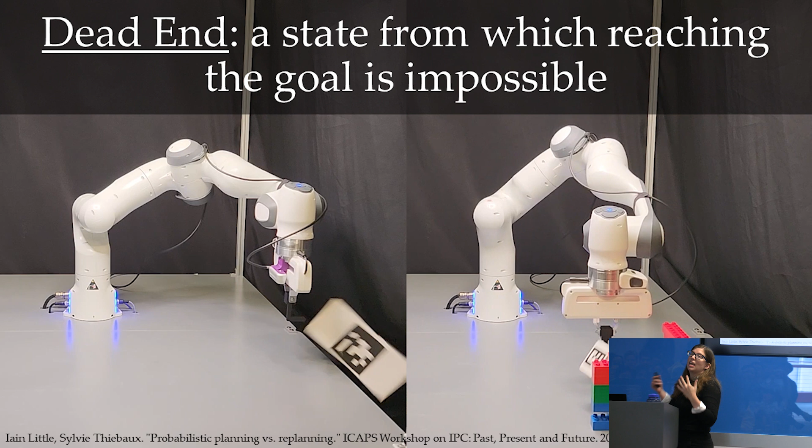What if your robot knocks the object off the table? What if your robot pushes something into a corner where it can't get things out of? Both of these are instances of actions that lead to dead-end states. Dead-end states are states from which it is impossible to achieve the goal—you could be at a dead-end state because there are no actions possible, like it's out of reach, or there are actions possible but none of them will get to the goal. You're just going to stay there. It is the Hotel California of configuration space.

So what we want to specify is that if we're going to do this type of reactive planning, the constraint we need to maintain is that we need to move towards the goal. Yes, we want to plan sequences towards the goal, but we have to make sure in doing so we never take an action that leads to a dead end. We never do anything irrecoverable. Stated another way, if we never do anything catastrophic, we can keep planning and looping until we get to the goal. And so this is our planning problem: how do we generate sequences of actions, particularly with a focus on never hitting a dead end?

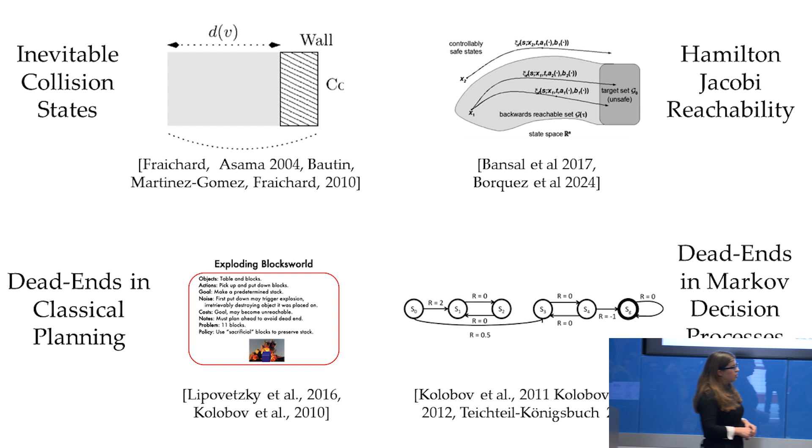Now, I've framed planning with uncertainty under dead ends in this context of dynamic non-prehensile manipulation because I think it's a beautiful illustrative example of it, but this has come up in a lot of other contexts across controls and motion planning. A lot of these contexts assume that either you have continuous dynamics or more certainty about your dynamics, or they assume you have a discrete state space. These make it hard to apply directly in our context, where we have both non-determinism and a continuous state space.

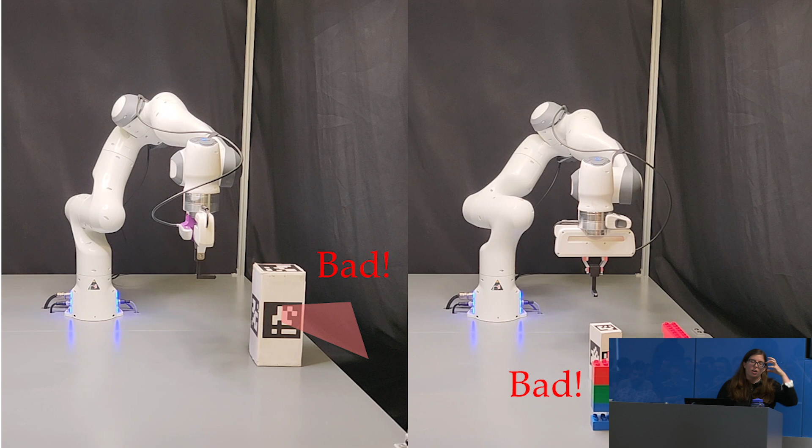And so what we're going to leverage is our outcome volumes to continuously characterize our dead end areas. To give the intuition in the simplest way possible: if our outcome volumes capture the space of possibilities, and some of those possibilities end us up in a bad area, then don't take that action, robot. That's the intuition of a planner that, if dealing with uncertainty and risk, enables robots to be guarded. And yes, that is the algorithm, and of course the name of the algorithm—you didn't think we'd get through without an acronym, right? Come on, guys. This is GUARD: Guiding Uncertainty, Accounting for Risk and Dynamics.

Before jumping into the algorithm, I'm going to discuss the environment in a bit more detail, establish some important assumptions, get into the algorithm, and then show incredibly preliminary results. To start off, we're going to consider that a robot is operating on a surface, trying to manipulate a target object to a goal pose, or more generally a goal region, through a series of dynamic actions.

We'll assume we might have obstacles in the world, and you also may have objects that you're not allowed to interact with. You can imagine this being a glass vase, that if you contact it, you have also hit a dead end because you can't put the glass vase back together.

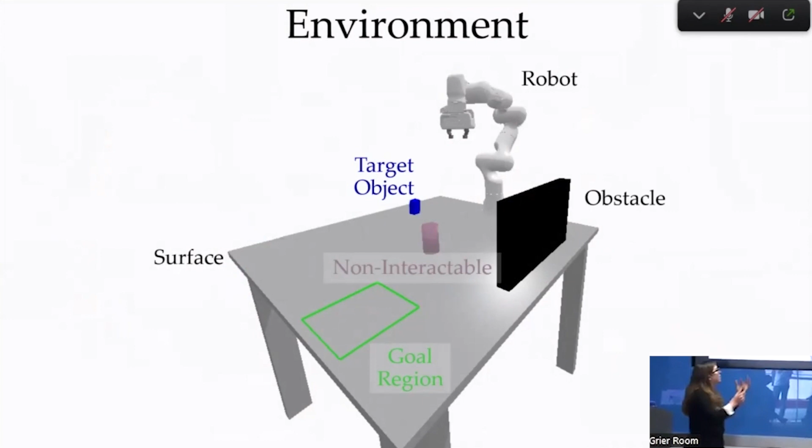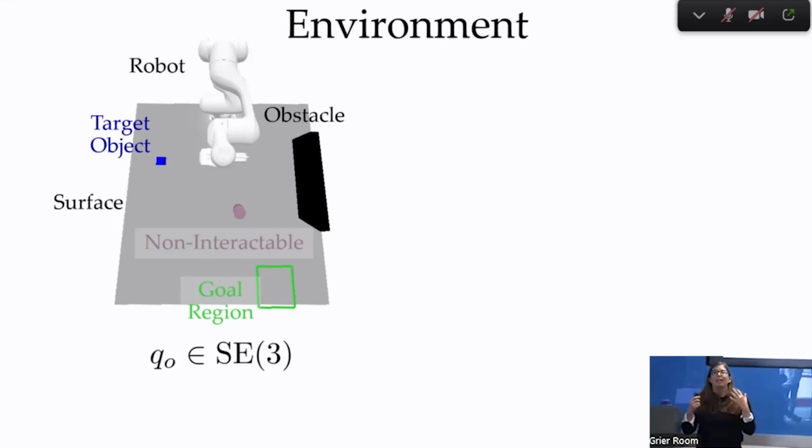So this is our environment that we're operating in, and we could represent the configuration of our target object in SE3. But we're going to leverage the fact that we're operating on a tabletop, and we're going to consider a factored configuration. This is to say, we're going to represent our configuration in 3 parts, first of which is, for our object, what face of the object is in contact with the surface.

For example, if you're dealing with a rectangular prism, leveraging symmetries, you can imagine there are 3 different faces that could be in contact with the surface. In addition to the first surface, we're going to characterize the configuration by a discretization of our planar orientation, and then our continuous planar position in XY.

I'm going to define the mode as being what face you're in and the discretized orientation. Both of these are discrete, and so we have a discrete number of modes. And the reason we're doing this is if you fix your mode, then your configuration space is then your planar position, which is in R2. And this is going to be critical for making a lot of our computations later on efficient.

This also means I can give kind of the planar visualization of our environment, and I won't get into all the details of how this is directly computed, but I'm happy to talk about it at length.

The last critical assumption that I want to mention is that unlike in our task and motion planning context, for this particular planner, we are going to assume we have a discrete number of actions. So we have a discrete action space, a discrete number of pushes that we're trying to sequence.

Okay, given this, let's jump into the algorithm and see how we can encode that intuition algorithmically. So I'm going to visualize our algorithm in the components as we go, but I'm going to explain the algorithm effectively in 3 parts. First, we're going to construct 2 data structures: one is our action regions, and then our danger zones.

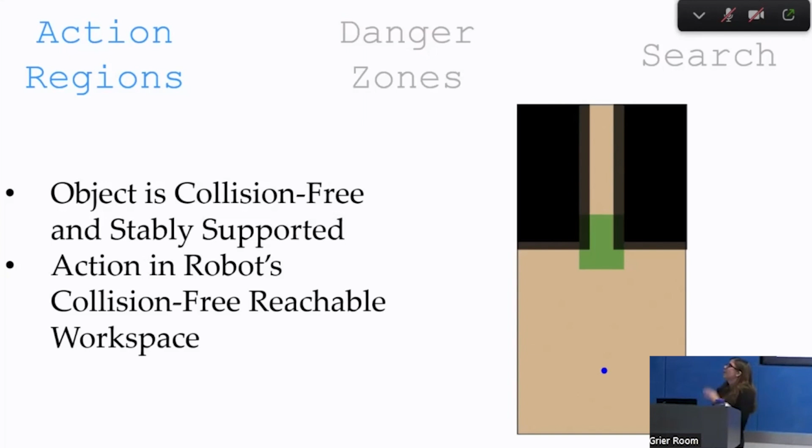The result of this is that we can effectively map our space into where each of our actions are feasible. And so each of these polygons corresponds to a set of different, subset of different actions being feasible. In addition, for any particular configuration, I can query what is the set of available actions.

This also defines something that is critical for defining our danger zones, because this defines where there are no actions that are feasible. And so if there are no actions that are feasible, this is a dead end, because if we're not at the goal, there's nothing we can do.

We also compute dead ends by computing a reachability graph over the regions and computing which regions have no path towards the goal. And combining these together, this is what gives us Z0, our base zone.

Z0 is our kind of base zone. This captures our dead ends. If our object at any point ends in zone 0, game over. So we want our planner to be able to avoid Z0.

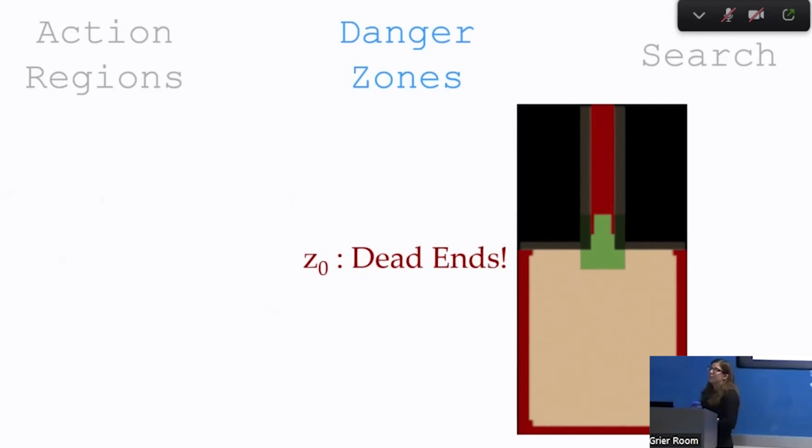In order to capture that, we compute where taking an action would lead us to zone 0. We do that by taking the preimage of zone 0 under each of the actions. This is where the positional independence of the outcome volumes is particularly critical. This effectively captures where there are actions that have some possibility of ending me up in the dead end zone.

Those are risky, and so I do not want to take those actions. Yes, Russ? Does this mean action reachability being learned is like in a polytope as opposed to a deep neural network? Yes, it produces, the outcome is a polygon.

And that's actually why we factor over the faces, because it's got to be in the same configuration space of R2.

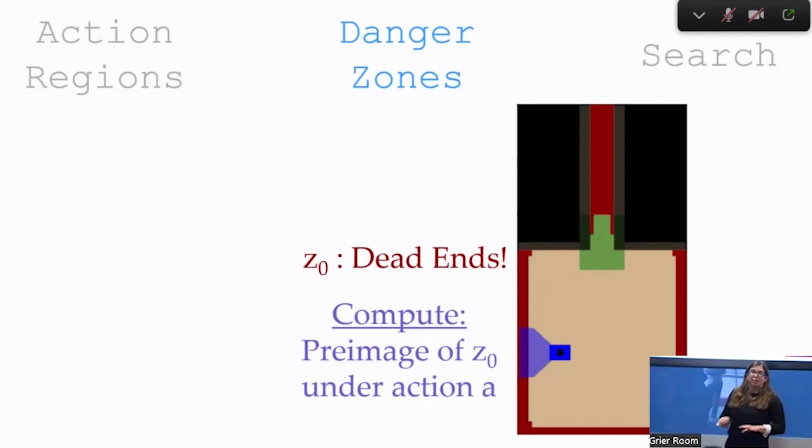We compute our preimages to tell us what is risky, and then we can kind of recursively say that if you are in some point where all of your feasible actions are risky, then you're kind of doomed. We define that as our subsequent zones, and we back up our areas of risk to define each of our subsequent zones where you only have risky actions.

So these are places you want to avoid. Action regions and danger zones are computed for each mode in the configuration space of the object. As I've established, that is in R2, so we do all of this using Minkowski sums, and because it's in R2, it is efficient. That is why we had to factor our configuration space.

Given that we have our danger zones, we can now leverage them within our planning and think about how we can plan towards the goal while avoiding these danger zones. We know that if we avoid them, we will not hit a dead end, and then we will succeed in our planning problem.

Within the thesis, we discuss a couple different sample-based motion planning methods. I'm only going to overview one that takes inspiration from PRMs, probabilistic roadmaps. So offline, we're going to build a graph.

We're sampling vertices, avoiding the danger zones. We define edges between two configurations if, based off an outcome volume, it's possible to reach that configuration, but we do so only if that outcome volume avoids danger zones. So for example, this edge is okay, but this is not, because it could get us into danger. Again, we're basically constraining the construction of our graph such that you never go into danger.

This is how we build our graph, and once we have this, based off this construction and the fact that we've done so in a fairly guarded way, we can now perform that contingent planning strategy, again knowing that we will never hit a dead end.

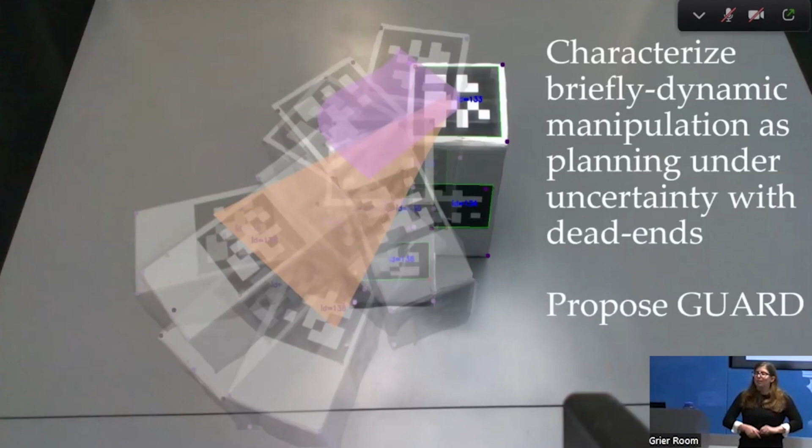So summarizing across all of this, wrapping up the technical component: I have always wanted to, and will continue to, focus on enabling robots to perform these long horizon manipulation tasks. It is really my dream to get robots to be able to cook things in the home and do these complex tasks. I would argue that in order to accomplish these types of tasks, it is fundamentally critical that we reason over both geometry and physics.

As Roberto highlighted, those are often separate, but I think it's critical that you look at the intersection. Choices in geometry impact your physics. We saw how thinking about your physics informs the type of uncertainty that you consider. So I think it is critical to really sit at the intersection, to look at all of it at the same time, as difficult as that is.

Throughout this thesis, to handle this, I propose models and algorithms. The focus is that I want it to be the robot's responsibility to do the reasoning over this geometry and physics. I fundamentally want to be lazy and make it the robot's responsibility to decide how it's going to act in the world. I think that is necessary for my robots to generalize and act all around.

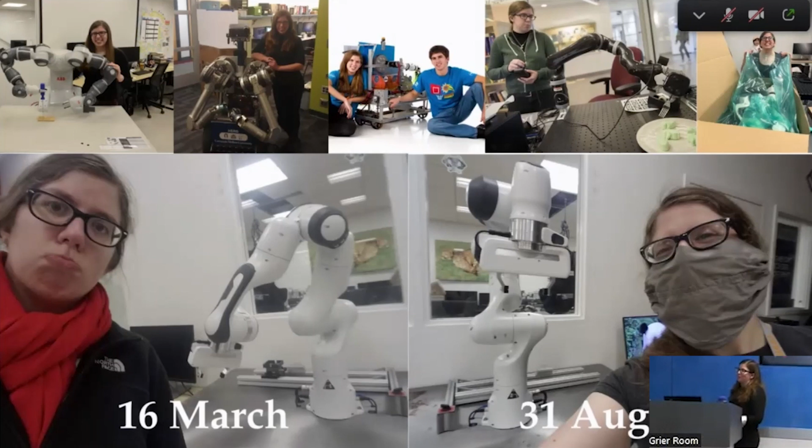I've gotten my blood, my sweat, my tears, my happy tears, my sad tears. I don't see that changing anytime soon, and I'm actually pretty happy with that. And so with that spirit, I want to end this part of my defense the way, honestly, a plurality of my advisory meetings have ended, which is with the phrase, damn the torpedoes, full steam ahead.

We won't stay on that slide. All right.

Well, thank you. Who wants to go first? Who wants to take on the challenge of the first question?

Any comments, any reactions to violence against bananas? Yeah, I felt a little threatened, honestly. Again, in Patrick's defense, I did explicitly request this, so he was doing a beautiful lab mate favor. Yeah, I want that on the record. I wouldn't have shown up like this if that wasn't requested. It's not like I came here just to frustrate Tomas or anything like that.

Anyways, so you talked a lot about the Minkowski sums and that being tractable in R2. But the question I had was a natural extension, which is, if you have these volumes, if you did have a probability distribution, then you could start thinking about, well, maybe there's a small amount of probability that you go off the table, but most of the time you're on the table, so maybe this is not that unreasonable of a move. How quickly intractable does that become if you start going down that path?